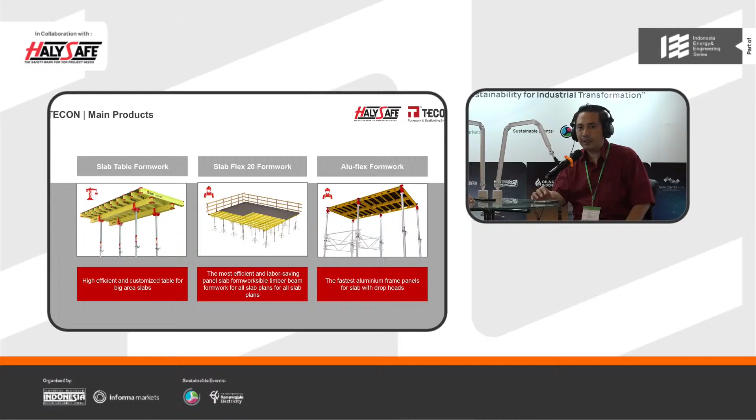Saya ingin berbagi sesuatu yang sangat menarik, khususnya untuk kita yang bergerak di dunia konstruksi, engineering, dan kalian yang sedang mencari solusi efisien dari produk Formwork untuk proyek pembangunan. Kita akan ngobrol soal bagaimana teknologi konstruksi terus berkembang, dan salah satu inovasi yang menjadi perhatian adalah sistem bekisting modern atau Formwork system, di mana Formwork system ini akan meninggalkan bekisting konvensional karena produktivitasnya yang tinggi.

Kami dari HalySafe bekerja sama dengan TECON dari Formwork, China. Kita berkolaborasi untuk menghadirkan suatu produk yang efisien dan bagus kepada kontraktor-kontraktor, kepada pengguna jasa kami.

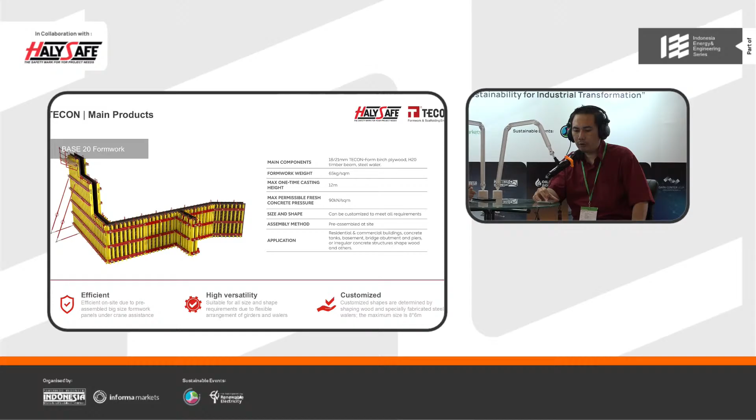PT HalySafe sendiri didirikan di tahun 2008, berawal dari Kota Pekanbaru Riau yang fokus utama pada penyediaan produk keselamatan kerja dan sistem scaffolding untuk mendukung industri konstruksi dan energi. Visi dari PT HalySafe sendiri adalah untuk menghadirkan produk berkualitas tinggi dan aman.

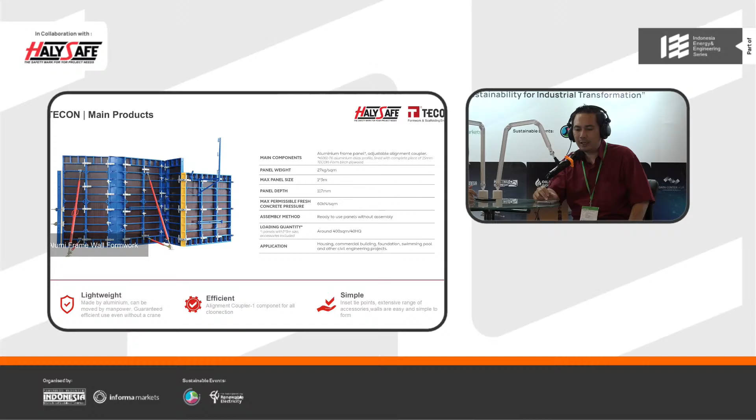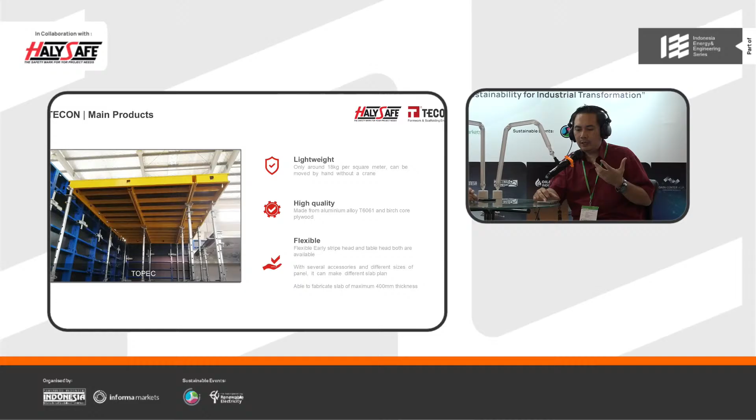Kantor kami berada di Marunda Center, daerah Bekasi. Umur kami sudah lebih dari 15 tahun di industri konstruksi ini, dan kami sudah dipercaya untuk memegang proyek-proyek besar yang berstandar internasional. Efisiensi yang kami berikan juga tinggi, serta dari segi safety, produk kami mendukung keselamatan kerjanya.

Saat ini HalySafe tidak hanya menyediakan produk konstruksi, teknis, custom engineering, serta dukungan teknis di lapangan. Kami percaya bahwa masa depan konstruksi membutuhkan solusi yang tepat, cermat, dan aman.

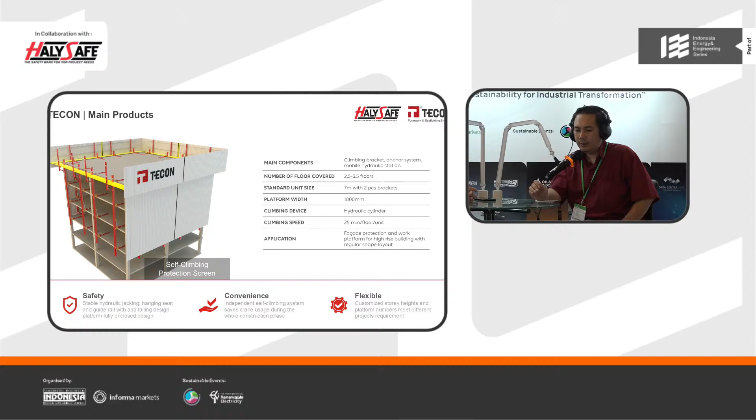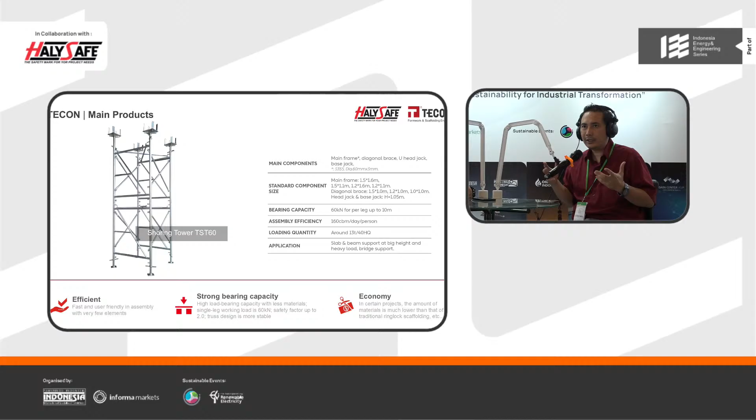Oke, berarti kalau boleh saya recap nih tentang pengenalan PT HalySafe. Berarti sebelumnya PT HalySafe belum masuk ke dunia Formwork ya? PT HalySafe berawal dari scaffolding, industri scaffolding dulu. Scaffolding itu digunakan untuk akses orang naik ketika melakukan pengecoran, melakukan inspeksi seperti itu. Dan sekarang yang baru kita tawarkan dan kembangkan adalah di dunia Formwork-nya.

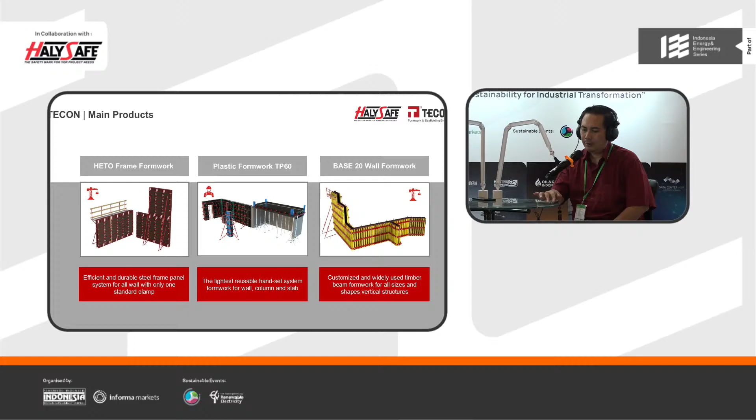Nah, teman-teman pasti pengen bertanya nih, kenapa sih HalySafe yang dari awalnya mempunyai core bisnis scaffolding nih, berarti pembelian, penyewaan, dan aplikator ya? Hal apa yang menjadikan HalySafe pengen mengembangkan sayap di bidang Formwork nih? Apa sih yang menjadi dasarnya Mas?

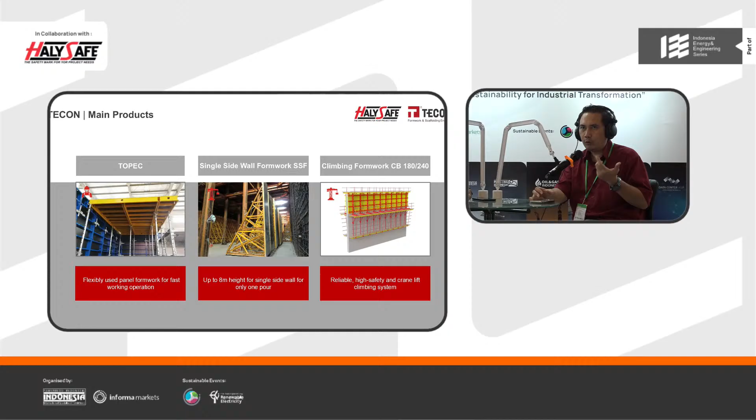Yang menjadi dasar sebenarnya adalah masalah yang sering terjadi pada penggunaan bekisting tradisional itu waktunya lama untuk fabrikasi, terus kurang presisi. Jadi begitu install, harus ada pengecekan ulang sehingga dari schedule itu sangat memungkinkan sekali untuk telat. Lalu untuk kebutuhan tenaga kerja itu banyak, karena tidak tersistem atau terpanel seperti produk-produk terbaru dari TECON tersebut. Yang terakhir, bekisting tradisional tidak ramah lingkungan atau banyak menimbulkan sampah. Makanya sampah itu sendiri kita minimalisir di proyek sehingga proyek ini bisa menjadi ramah lingkungan, dengan penggunaan sisa material yang sedikit.

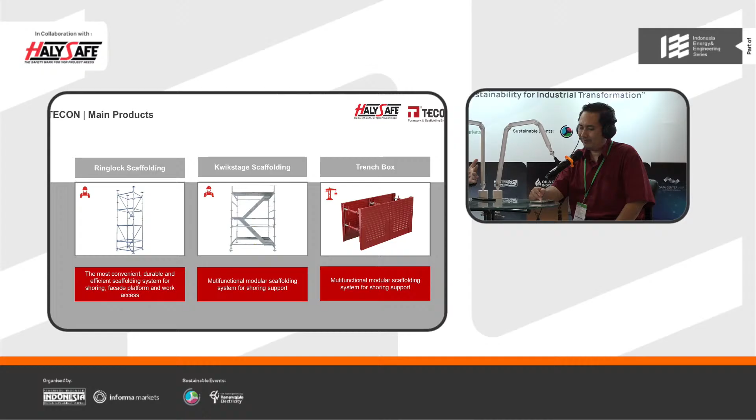Oke, I see. Berarti kalau dilihat dari sisi teknis dan sumber daya alat yang Mas Bagas sampaikan tadi, itulah beberapa hal yang menjadikan HalySafe pengen berkembang untuk mengembangkan sayap di bidang formwork. Mungkin ada nggak ya Mas alasan yang bisa memperkuat HalySafe untuk bisa mengembangkan sayap dari segi sumber daya manusia? Contohnya, karena HalySafe mempunyai tim engineering atau tim yang berpengalaman di bidang formwork, apakah ada juga di HalySafe untuk saat ini?

Pasti, di HalySafe sekarang kami juga melakukan riset sebelum memutuskan untuk bergerak di bidang formwork. Kami riset juga di bidang engineeringnya seperti apa, terus project-project yang sedang ongoing seperti apa, kita riset semua. Jadi yang kita butuhkan itu memang solusinya tepat dari engineering. Kita menghitung, awal mula adalah dari engineering kita pasti menghitung dan merencanakan di awal. Setelah kami rencanakan, nanti kami terapkan di lapangan dan kami evaluasi. Di evaluasi itu kami ada formwork instructornya atau kami bisa terpasang sekalian, dan nanti kami juga ada tim untuk memonitoring schedule-nya seperti itu.

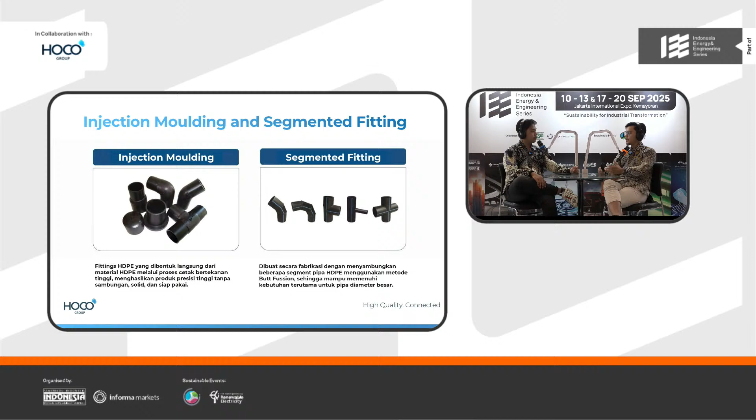Kenapa? Karena kita menyediakan fitting-fitting seperti injection molding atau segmented fitting untuk pipa HDPE, yang dimana pabrikan-pabrikan pipa lain itu tidak menyediakan fitting-fitting ini. Beberapa pabrikan tidak menyediakan fitting-fitting ini. Maka dari itu HOCO Group dengan motonya One Stop Solution, kita menyediakan injection molding dan segmented mulai dari ukuran terkecil sampai ukuran terbesar, yaitu di 1200 pada saat ini, Bapak Denis.

Dan juga HOCO Group melalui brandnya HQ, kita juga menyediakan fitting-fitting terkecil atau fitting-fitting mekanikal mulai dari ukuran 20 mm sampai ukuran 4 inch untuk fitting compressionnya. Berbagai jenis fitting pun kita lengkap, dari elbow, dari male, adaptor, female, ball valve yang compression, stop and flank, kita ada semua, Bapak Denis di sini. Firewall, clamp saddle pun kita ada.

Selain itu untuk yang biasa digunakan oleh penyedia air atau PDAM, itu biasa menggunakan push fit dari produk HQ ini, Bapak Denis. Yang dimana push fit ini tidak perlu menggunakan alat khusus atau alat pemanas ataupun lem, itu tidak perlu, itu makan waktu. Nah, dengan kita menggunakan push fit ini, dia tinggal dicolokkan saja pipanya ke fitting. Yang dimana itu bisa hemat waktu, hemat biaya, dan hemat tenaga. Karena tinggal dicolok saja langsung air mengalir.

Dan jenis fittingnya pun bervariasi. Ada elbow, ada adaptor, male, female, dan lain-lain pun kita sediakan semuanya. Karena kita itu punya moto One Stop Solution, jadi benar-benar seluruh konsumen atau kontraktor atau owner hanya datang di HOCO Group aja, tidak perlu melihat-lihat yang lain.

Dan yang terakhir kalau kita bicara instrumen perpipaan atau plumbing, itu tidak lepas dari valve, Bapak Denis. Betul. Valve dari HOCO Group itu kita memiliki berbagai macam jenis, gate valve, check valve, strainer, ball valve, dan yang lain-lainnya. Dan yang terunik kita juga memiliki untuk yang brassnya itu ada brass ball valve check valve. Itu yang biasa digunakan di PDAM, Bapak Denis. Itu bisa untuk menurunkan tingkat NRW.

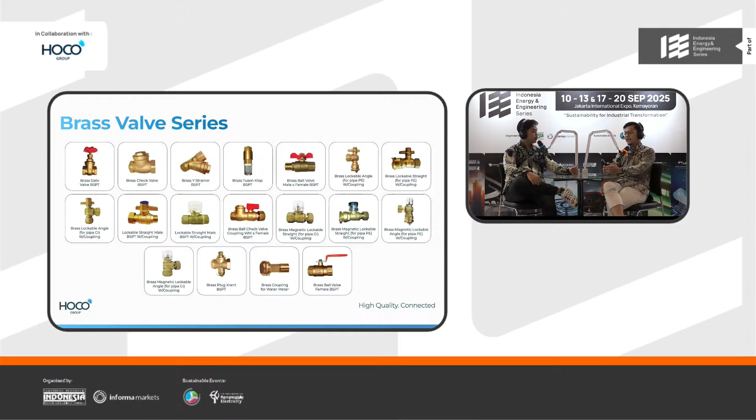Nah, untuk fitting-fitting ini kita bagi beberapa jenis. Ada yang dari bahannya kita ada brass valve, ada yang cast iron, ada yang ductile cast iron. Kalau dari standar valve-nya kita bisa mengacu ke JIS juga kita ada, Bapak Denis. JIS 5K, JIS 10K kita ada. Kalau yang biasa menggunakan ISO, kita juga bisa mengacu ke PN 10, PN 16, PN 20 atau 25 kita pun sedia, Bapak Denis. Dan yang terakhir yang biasa jarang ada di Indonesia, itu biasa digunakan di oil dan gas, itu menggunakan standar ASME. Itu dengan standar ANSI 150, ANSI 300 kita pun sedia.

Jadi benar-benar seluruh sistem perpipaan atau infrastruktur perpipaan itu kita sediakan. Mulai dari hulu sampai hilir. Mulai dari pipa induk sampai pipa sambungan rumah, bahkan kran pun kita sediakan, Bapak Denis. Hanya saja pompa dan meter air yang kita belum ada, Bapak Denis. Tapi mungkin ke depannya kita akan berinovasi ke arah tersebut, Bapak Denis.

Seperti itu, Bapak Denis. Dan yang terakhir, kalau kontraktor mungkin bingung cara masangnya seperti apa sih pipa HDPE ini, kita juga sediakan mesinnya, mesin welding, terkhusus mesin butt fusion ini, Bapak Denis. Mesin butt fusion ini dia menyambungkan kedua pipa itu sama-sama yang bersifat homogen. Jadi di sambungannya tersebut seperti badan pipa yang utuh pada umumnya. Jadi benar-benar dia homogen, kekuatannya sama, kelenturannya sama, dan dia benar-benar bisa mengikuti kontur dari Indonesia ini, Bapak Denis.

Baik Pak Faris dan sobat-sobat HOCO semua. Jadi bisa dikatakan HOCO Group ini one stop solution ya, karena mulai dari proses penyambungan pipanya, dari varian pipa dengan ukuran-ukuran dan yang apapun yang bervariatif itu, betul, bahkan sampai ke fitting, aksesoris dan lain-lain sudah disediakan oleh HOCO Group ya. Betul Bapak Denis. Oke, mungkin kiranya itu yang bisa kita sampaikan kali ya.

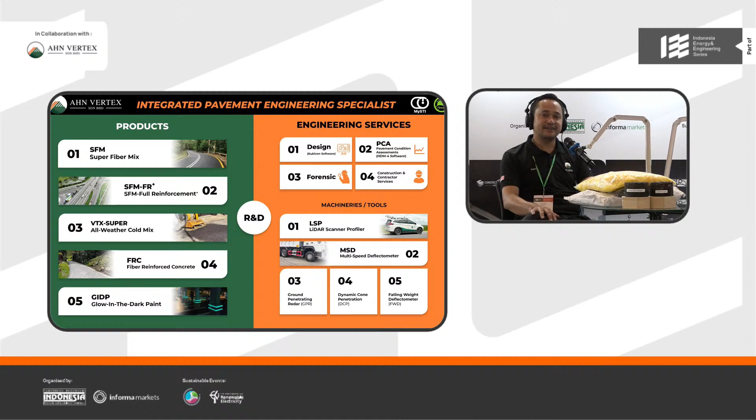I will share with you a bit later on. Our first product is the SFM, short for Super Fiber Mix. It is one of our specialty mixes that we use in Malaysia. We have a conventional mix and also special mixes here in Malaysia. Super Fiber Mix is now the number one special mix in Malaysia, and it has been used widely all over Malaysia, including Brunei.

Now we are entering Thailand, and we are hoping one day we can start here in Indonesia. It has been used on more than 12 million square meters all over Malaysia, equivalent to close to 3,500 kilometers of road total.

What does it do generally? We mix our normal asphalt with this specialized fiber. Why is it special? Because it's mainly made of aramid, the same material that we use to build our tanks, our armored vehicles, our space shuttle. The same material, we put it into our asphalt and it makes it stronger, way more stronger.

Currently, this technology, we've been using it for a long, long time, probably decades or even close to a century. So now we have provided an innovative solution where we further increase our road strength. Generally speaking, it is also very suitable in Malaysia and also in Indonesia.

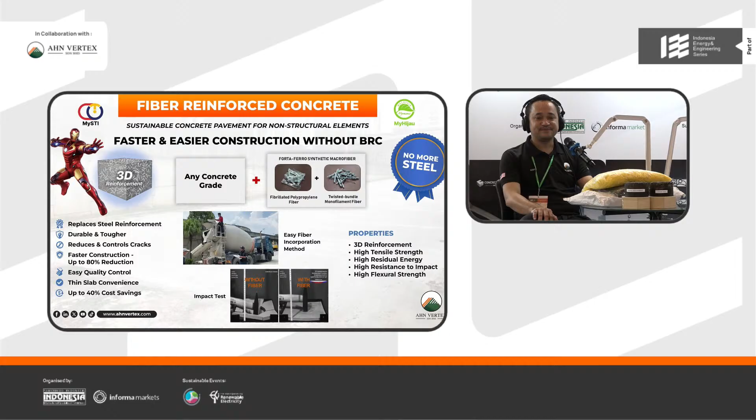Next, actually one of our hobbies, we have glow in the dark paint. It can glow up to 10 hours. Now it is being widely used in Malaysia, but of course it's still a new, novel technology. It's the only one in the world that can glow up to 10 hours.

How it works is that it charges using light, artificial or even sunlight, and then at night it releases that energy and gives you a glowing effect up to 10 hours.

Whether you use it on roads, on signages, or inside buildings for emergencies in case you don't have electricity, such as when there's a fire going on, we have done it inside buildings for emergency cases. Your creativity is your limit. Since it is paint-based, you can use it on any surface, be it metal, asphalt, concrete, or even wood. It's very nice actually.

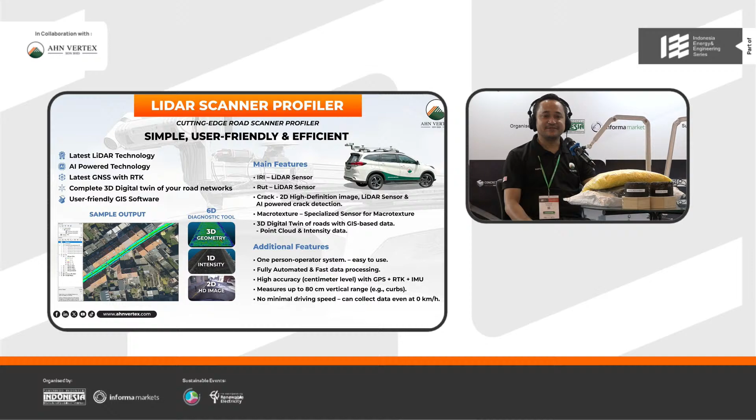Next is our MSD. Just now the LiDAR checks your surface, and our last product is MSD, multi-speed deflectometer, which checks the structure of your pavement. Again, you just drive through, scan your roads, and the decision maker will get a GIS-based mapping to know where they should optimize or repair the road, instead of second guessing anymore where repairs are needed. I think that is it from me.

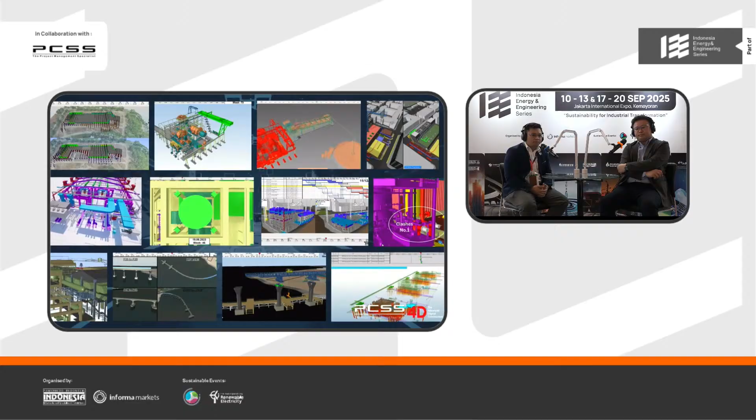So you want to talk about our projects? I think we've been involved in a lot of projects from the beginning - in the construction of buildings, mining, oil and gas, and infrastructure work such as bridges and MRT. So this is all of the projects that we are involved in. With this kind of experience, we try to bring it to Indonesia and spread this as a solution to the complex projects that we have there.

I remember that you did one project in Australia for one of the Australian clients. I think that's pretty impressive, isn't it? Yes, that was a gold mining infrastructure project that we wanted to build in Australia, and they asked us to simulate their work program into a 4D simulation.

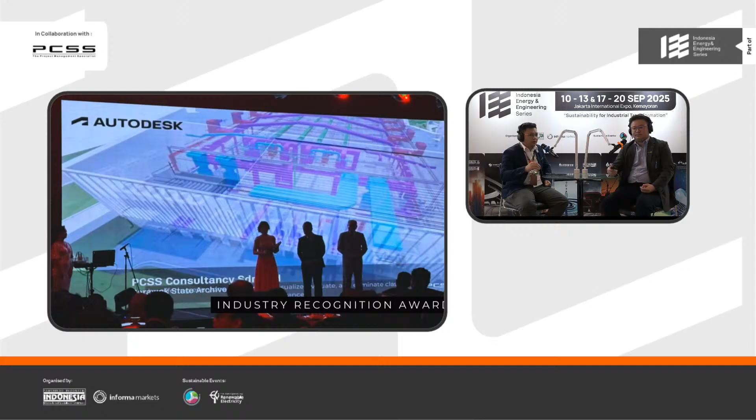In terms of what we're doing right now, it's not easy for the engineer itself to learn. That's why I suppose you train a lot of engineers, giving training and mentoring services to these guys. Yes, this is part of the solutions. If you want the solution to be sustained, we also need to train the users how to operate it, and based on our experience, we can share how it can be valuable to the industry.

I suppose all your training is proven, and I can see that from the screen itself. There are a lot of awards that PCSS has won, and it's now recognized as one of the best project management companies in the region, especially on digital construction. I think your vision plays an important role in PCSS, so that we can move forward.

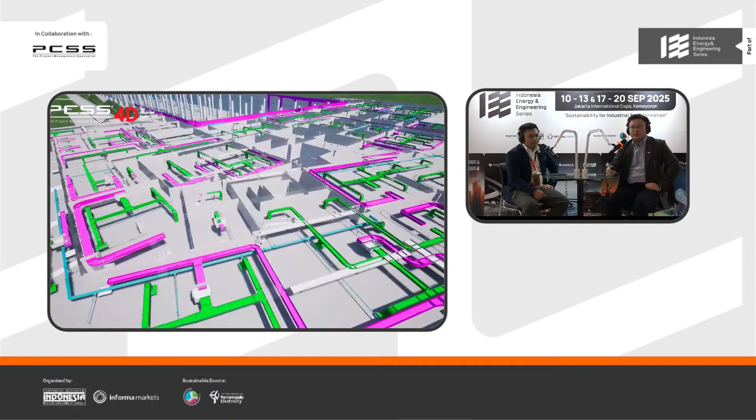In terms of Indonesia, what will be your target there, and what can we do to serve Indonesia with this kind of achievement? I think the whole idea of the company is to share capabilities and knowledge with all the peers in the industry, other than making money for the company. The whole idea is sharing the knowledge and using technology to really resolve our day-to-day work, especially in engineering works.

It's difficult, and we don't have enough engineers in the construction industries right now. I suppose this oil and gas project you were involved in gives us an eye-opener on how project management can be so different, in terms of execution. So how do you make decisions right now in terms of construction planning? Does it help clear the clouds between you and the client?

I think it started with the same questions we usually get asked during construction - what is going to be constructed, what is going to be installed at this time period. In your time, there was no solution like this BIM solution, so it was very hard to explain, right? With nowadays' innovative technologies, it can bring the construction industry up to another level.

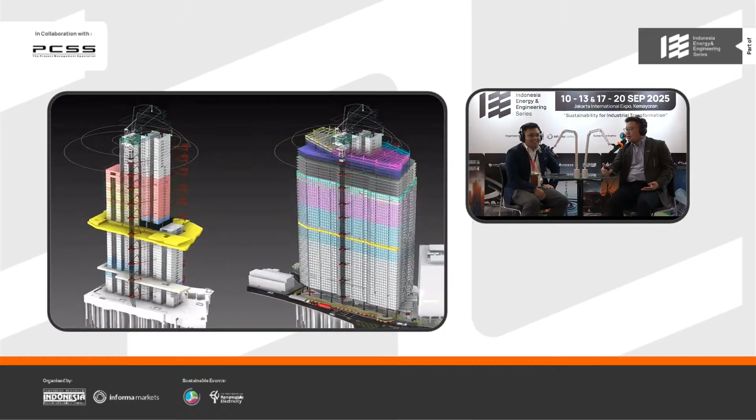More clarity - I suppose this is how it's going to look. Quite nice, right? You can see the whole simulation of how this construction is being built and how it's put together. I suppose non-engineers, when they look at this, understand that it's idiot-proof now - very easy, intuitive, and you can combine it with other methods like this one. This is quite nice. What we do is like site coordination.

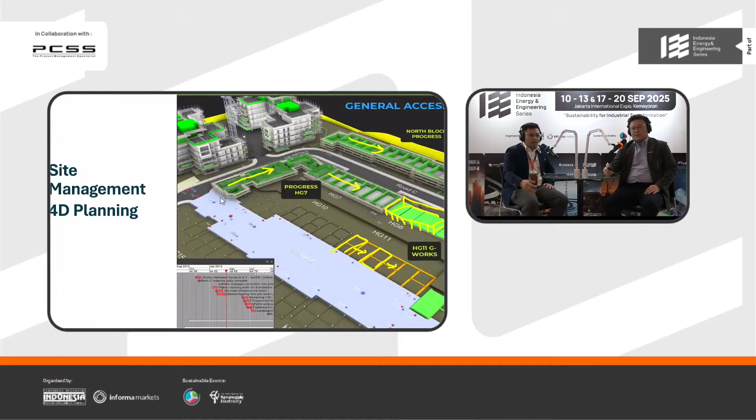Using it for logistics and spatial analysis, all of this is very innovative. Last time we used to do it using a 2D plan drawing. This basically goes back to the basics, where you see it and believe it on your plan itself, so it becomes very easy to pick up what's going on.

This is one of the very success stories, because the equipment was being delayed and we needed to install it under 10 months. In the board meeting room they asked when this machine was going to be installed, and we said yes, we can install it.

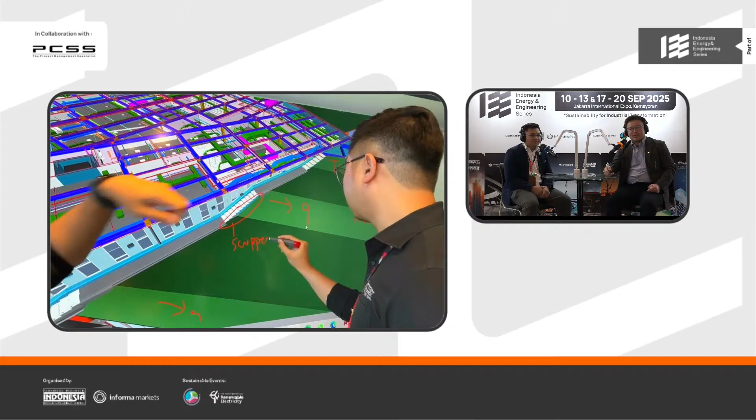So you see it before it happens on site. We rehearse it. This is where digital construction helps you in terms of how you deliver your project itself, and enhance your discussion through dashboarding and the technologies and platforms that we use.

So basically it's all about improving the whole communication workflow. I think that is the highest tier that we want to achieve.

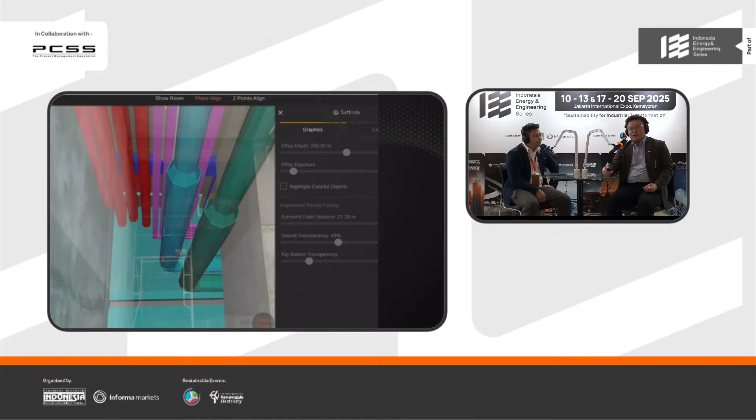Try to look at this graph that we have right now. Basically, before you even build the pipeline into the area that you need, you can use the model itself to look through what's coming up next in the construction, which helps in terms of the planning itself.

Yes, you look from the top level until the bottom level of the M&E, so you can prioritize which item you want to install first and which team you want to move first in the area. So using 4D is easy—it's a medium for coordination.

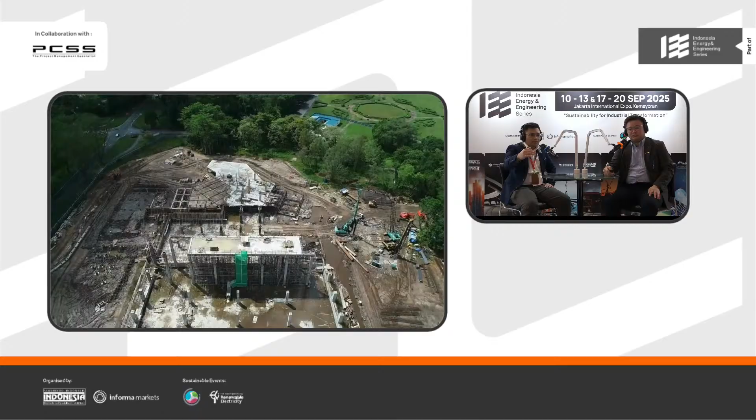In the reality mapping for our company, we try to capture all the surrounding areas of the project site, so that we give another vision to our planning, because previously our planning was just focused on the scope of work.

So basically it's like site constructions—any obstruction on site, you try to have coordination meetings. I suppose this really helps in terms of the whole monitoring of the project itself, and I'm quite impressed with this output.

This is what we did about 2 or 3 years ago in PCSS. With the projects we have today, it probably goes beyond that. One of the best monitoring projects we have right now is the cross-region project between these two countries—Singapore and Malaysia.

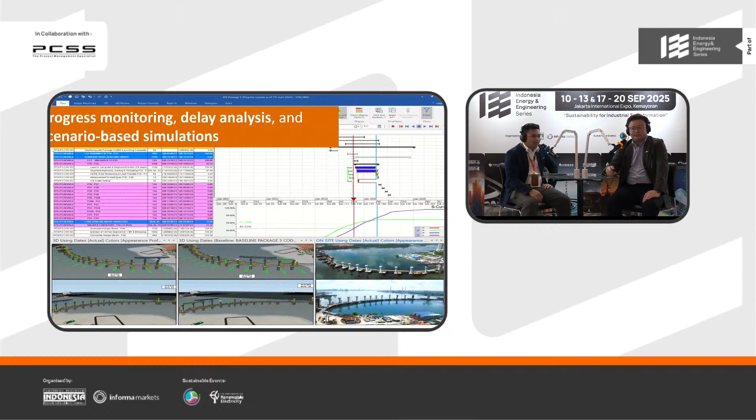This is part of our involvement, and we help in terms of identifying the critical activities using 4D. When issues come up, 4D helps us optimize the schedules and find another path in our critical path, so that we can complete on time.

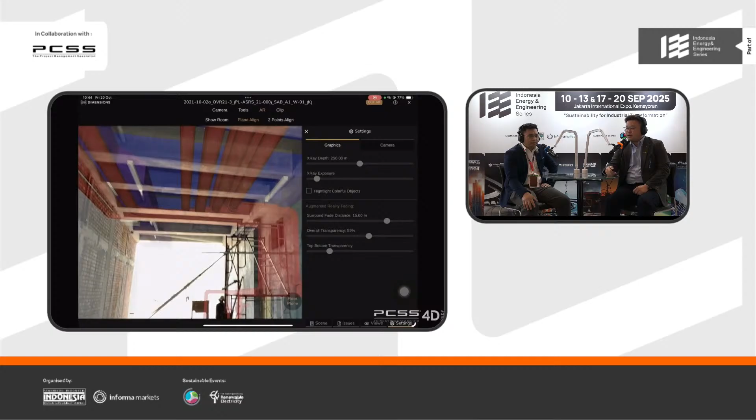I can see that you also use the VR and AR system on site. This is quite good actually—once you have 4D inside the project, you can bring in other technologies.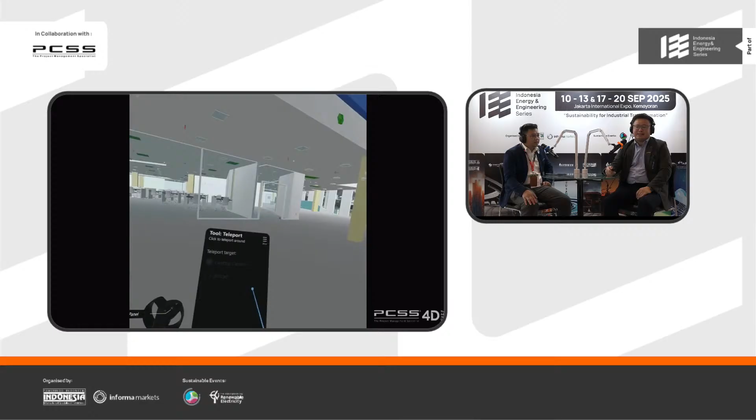And these technologies, VR, at times we want to go on site when we want to do VR, so we need to use 4D to set up the time. It gives you clarity to look at what's going on inside there, and gives us a lot of clarity in terms of coordination on site.

So basically, this reduces the learning curve for the engineers, so that they know and understand it. So try to look at this right now.

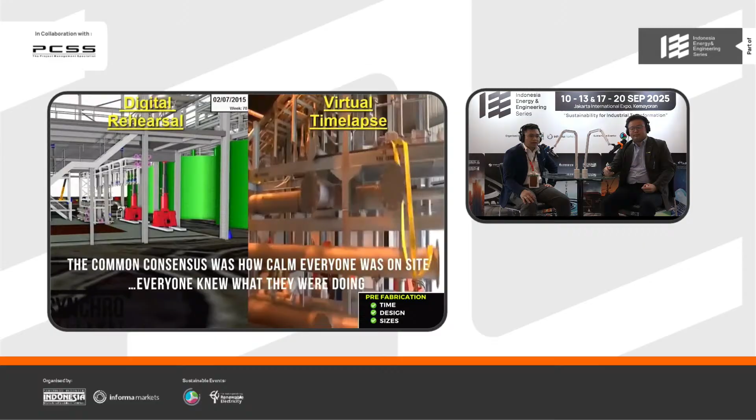We basically did a digital rehearsal before it really happened on site. This is what you practice on and talk to the clients about. By viewing the constructability earlier on, this gives us more in-depth understanding of the sequence of work, and also helps coordinate between our project teams.

These are really good solutions that we've been providing in Southeast Asia right now. As PCSS, we've been here since 2018. We have had clients like PTPP, Adhi Karya, Pertamina. We try to look at more opportunities. Our idea is to come to Indonesia to share knowledge, to learn together. We hope that one day we can come here to Indonesia to share more ideas. We are Asian countries, we are neighbors, so I suppose it's good for us to keep doing what we're doing and share the knowledge of what's happening around the region.

Especially with the exposure that we have, I would like to bring to you these videos - the Rapid Transit System RTS Johor Bahru, one of the Singapore updates and constructions that we have done.

The dream of a seamless connection between Malaysia and Singapore took shape in the form of the rapid transit system, a monumental project designed to link these two nations closer. Building such a bridge was no easy feat - it took good coordination and was successfully delivered harmoniously. It was a story of complex challenges, innovative solutions, and unwavering dedication.

At the heart of this narrative lies package three, the marine viaduct.

By December 2024, the package three marine viaduct was completed, meeting key milestones. The project is on track to finish, and if you need any context or more information.

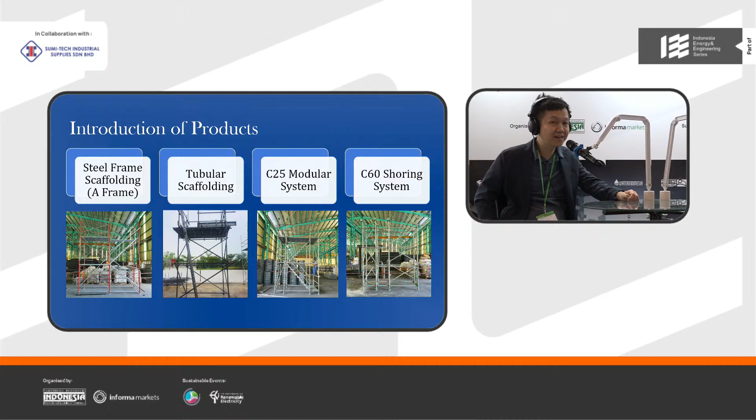So if clients are interested to buy our system, I would always say it's better to have a versatile system, because in construction we do not know what will be our next project. If we have a versatile system, it could be used for whatever future projects, no matter whether it's a data center project, an infrastructure or bridge project, or maybe just a low-rise, shop houses, or double-story terrace houses.

So the product is actually very versatile, as it can be used from small scale projects up until large scale projects.

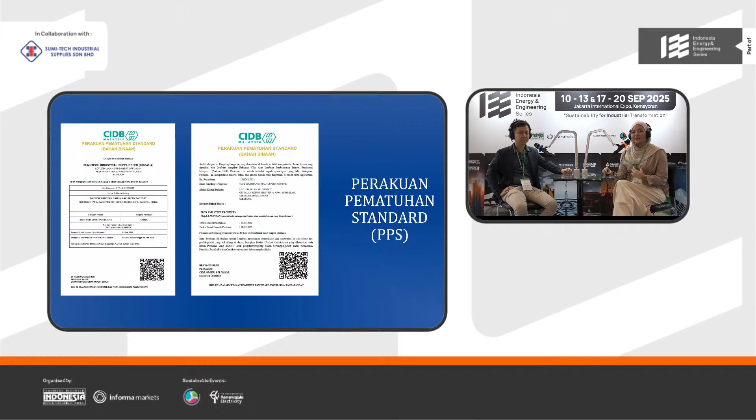Our product is also manufactured under strict quality control, following the compliance of CIDB certification. With that, we can say that our product is very reliable and safe to be used.

Next, I'll be sharing with you our C60 shoring system video.

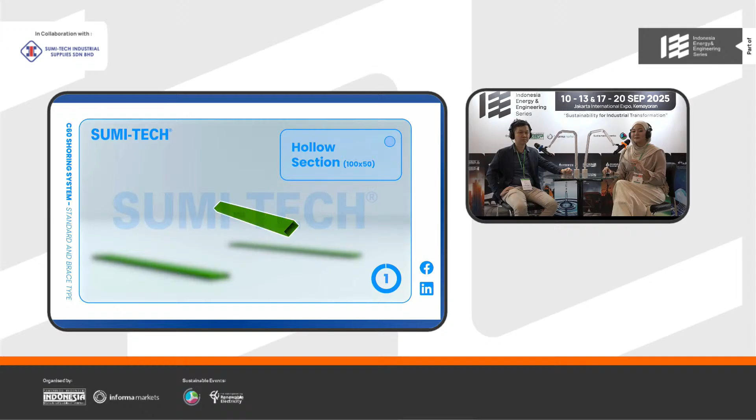Our C60 shoring system actually has a high load bearing capacity, and it can be used from small projects up until large kind of projects.

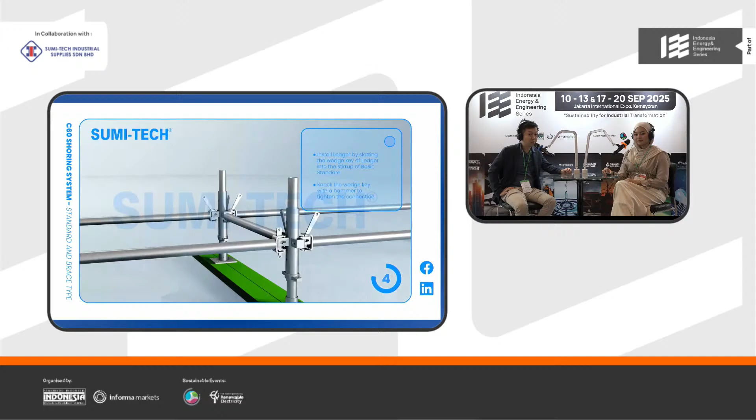As you can see in the video, this is called a modular scaffolding system, where a wedge key is joined into a stirrup. The only tool you will require for this system is a hammer to tighten the wedge key to the stirrup. It is very convenient and easy to install.

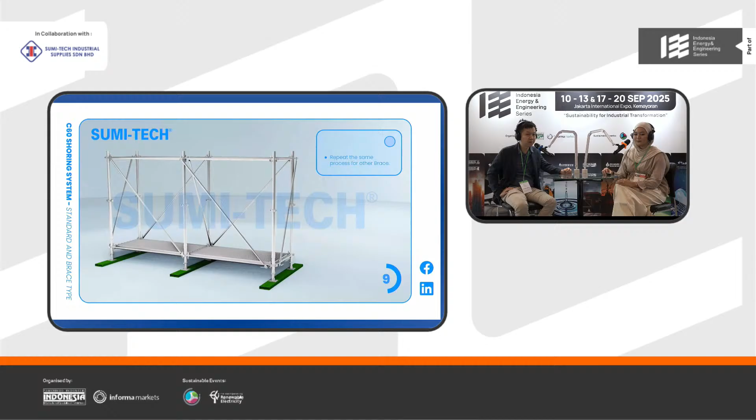With the horizontal member, the vertical member, and even the diagonal member, the shoring system or scaffolding system will be very stable and rigid.

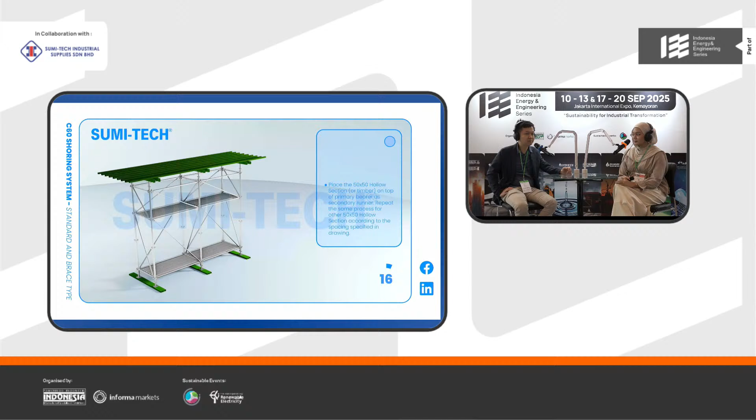So if you look at the video, on top of the U-head, you can actually put whatever as the primary member and the secondary member as formwork. You can actually use hollow sections, or you can even use timber structures. It can be used for various sizes for the hollow section, right? Correct.

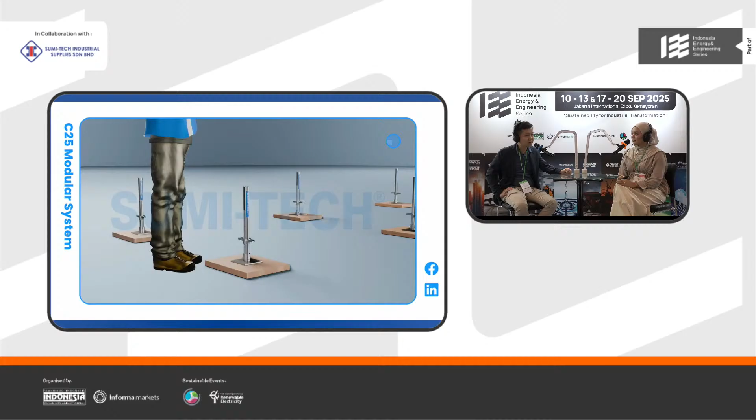Alright, so next I'll be sharing with you guys about another system, which is the C25 modular system. The C25 modular system is basically similar to the C60 shoring system, but slightly lighter duty because the vertical member is smaller compared to the C60 shoring system. So normally the C25 modular system will be used for light duty shoring, and also as a scaffolding, a working platform, and an access tower.

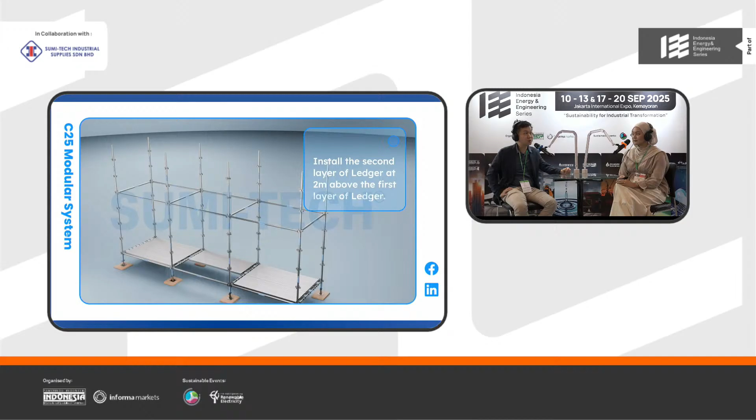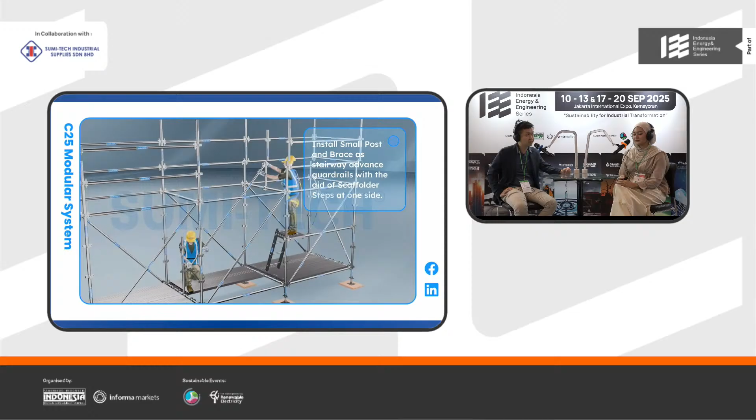Recently, we have been updating our system to comply with SG4, where now we are not looking at safety only for the users on the platform, but we are also stressing the safety of the erector as well. As you can see, the erection method introduced in this video is actually utilizing the latest method from SG4, where all the guardrail systems are pre-installed. That means it's considered an advanced guardrail, which is installed at the lift below before the workers access the lift above. Practically, with this installation method, you will not need any safety harness anymore.

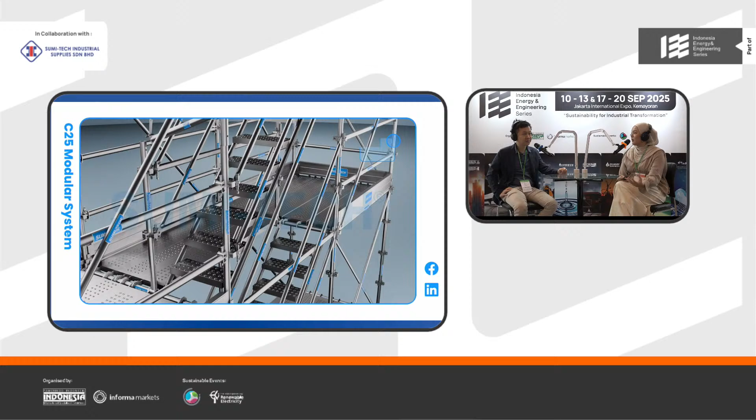Even I myself might, or you maybe, would dare to go up and install it yourself, as you wouldn't be exposed to any risk of falling at all. Correct, that's what we want to focus on. This system focuses more on the safety of the erector and the worker itself, so that they are not afraid to assemble. This is in fact according to the latest UK guideline, SG4, that I mentioned just now. So we do hope the industry is improving and getting better and better in safety performance, hopefully.

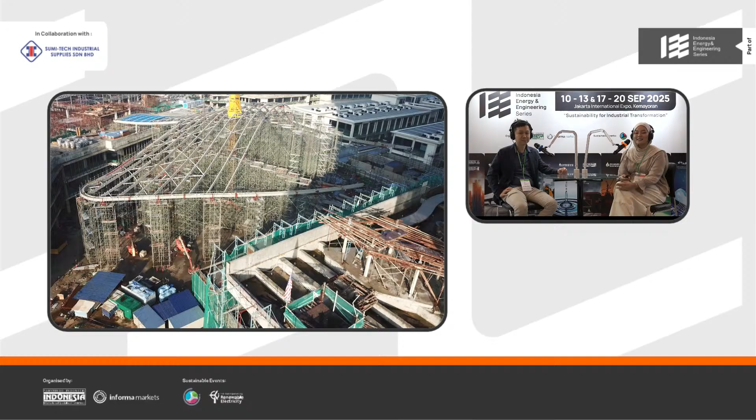All right, moving on. This is the photos of our past project, and we are also proud to share that we are part of the Merdeka 118 construction, supplying our steel scaffolding for them. Today, Merdeka 118 is known as Malaysia's tallest skyscraper.

Before we end it, is there anything you would like to add? Okay, so at the moment, we would like to look for local partners in Indonesia, hopefully so that we can expand our business into Indonesia.

And we are very confident in the market of Indonesia, as from what we know, the conventional A-frame, the traditional A-frame type, is not allowed to be used at certain projects. So now more and more projects in Indonesia hopefully will be using a modular scaffolding system. And of course, with all the new projects like data centers and industrial warehouses, hopefully our C60 table form system will be very suitable and very cost effective to be used, and to be introduced to Indonesia.

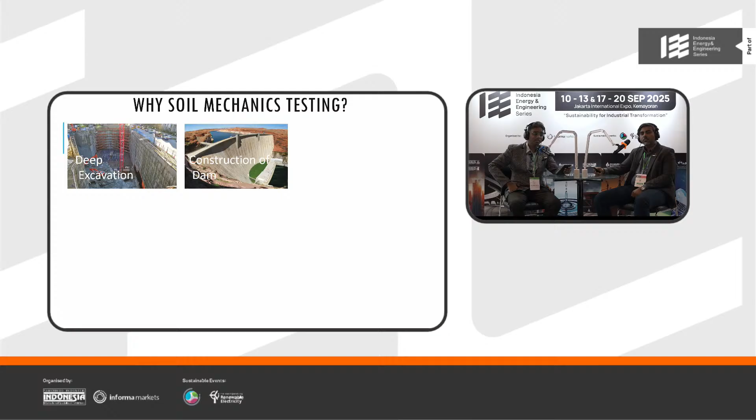So why soil mechanics testing? I think Ms. Nessa, you can explain this. Thank you, Mr. Kalai. As we know, all structures, including deep excavations and so on, depend on the soil beneath them, but soil varies greatly in terms of strength and behavior. Misjudging this can cause foundation failures and instability. That's why thorough soil analysis is crucial for safe and lasting construction. Tests like the triaxial compression test simulate real conditions to measure soil strength accurately. These tests help engineers design solid foundations that stand the test of time.

Then I'll hand the rest over to my colleague Kalayarasu to explain what he can offer. Thank you. So that means soil testing is very important. We cannot make any guesses, right? So we need to do actual testing to make sure whatever we're going to build on the soil is on solid ground. Yeah.

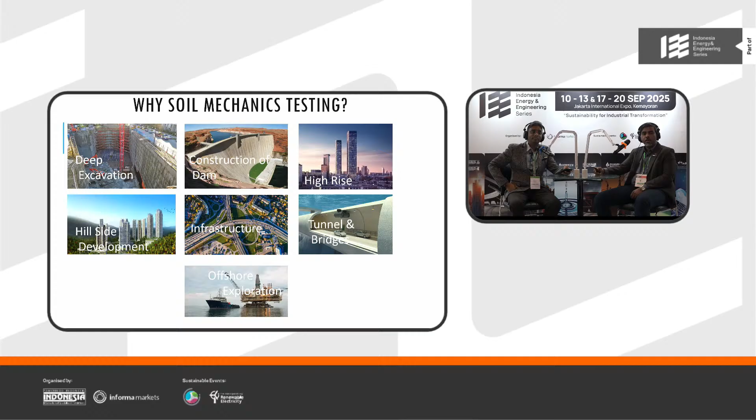But the nature of testing in the laboratory, in most laboratories, we have still been using manual equipment. Sometimes when there is a lot of testing, too many samples to be handled, we will have a lot of errors, a lot of mistakes happen. We faced this before too. Yes, so many. This leads to poor data, and this data becomes unreliable for geotechnical engineers to make any assessment.

This also leads to low productivity, meaning we cannot meet the testing in time. Certain projects are very high value and they need the project to be completed, and when there are a lot of samples, the laboratory usually lags behind. Not to mention, sometimes the equipment is also very expensive to maintain because they are usually very bulky, have a lot of components, and have to be manually serviced and maintained.

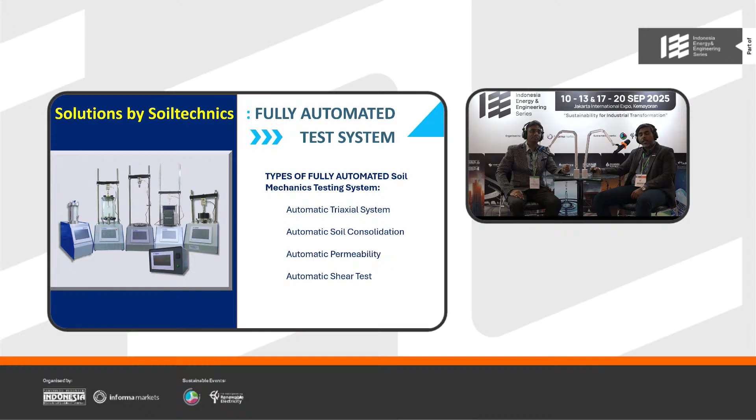So what we have to offer: Soiltechnics has a products division where we design and manufacture testing equipment. We have manufactured a fully automated test system which has tremendously benefited laboratories in terms of productivity. The tests are fully automated from start to finish, and because it is automatic, running 24/7, we are able to finish more tests in a given period of time. Thus productivity can be increased up to almost 70% compared to the manual test system.

Multi-test capability: our systems are very modular, so each system can be reconfigured to perform multiple tests and different kinds of testing.

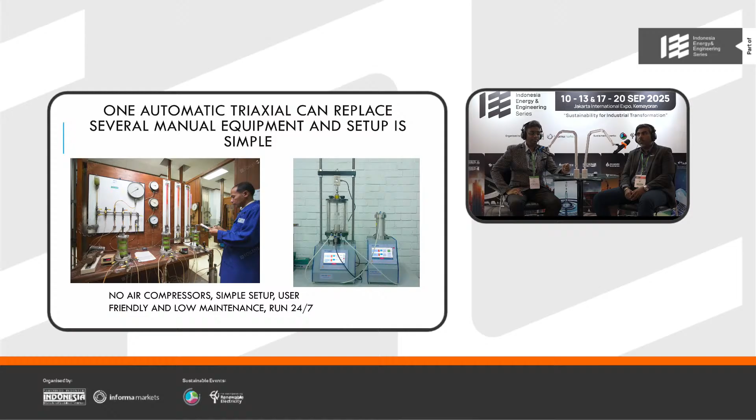This depends on the user. If they do not have a lot of volume, what they can do is purchase one device, and they can switch the configuration to perform multiple tests. This lowers the cost of setting up, especially for new labs. It's also very useful for universities where they do not necessarily need a lot of systems—they just have one or two systems and can reconfigure them to perform different tests. Yes, that's correct.

Even our software is modular, so we can do multi-stage setups, and for each stage you can create customizable test plans. You can create your own conditions, your own recipe, and the system, the computer, will run the test for you. Data acquisition and data logging are fully automated—there are no more physical papers, so data integrity is maintained.

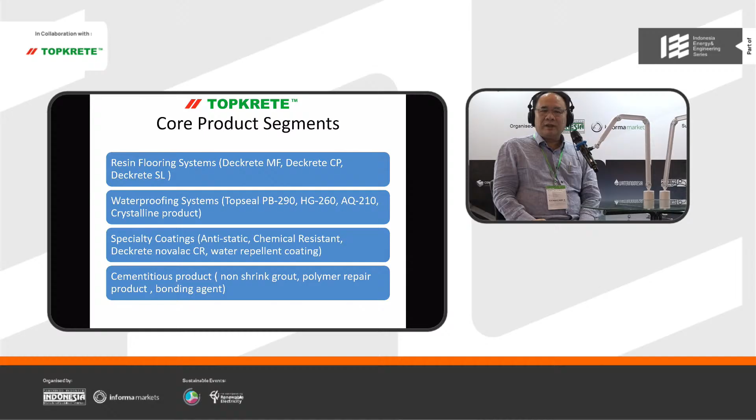What is the advantage of Topkrete? We produce seamless and durable coating, chemical and abrasion resistant, and HACCP compliant for the food industry, as well as long-lasting waterproofing performance.

This is some of our feature projects like car park system with Deckrete CP, food factory flooring with our Deckrete MF polyurethane self-leveling product, basement waterproofing system, RC waterproofing system, and resin floor system. We provide all kinds of concrete solutions in terms of protection, wear and tear resistance, and chemical resistance.

We have an innovation and R&D team, in-house technical expertise, cementitious product development, and collaboration with global partners around the world to keep developing and improving our product quality to meet the current market.

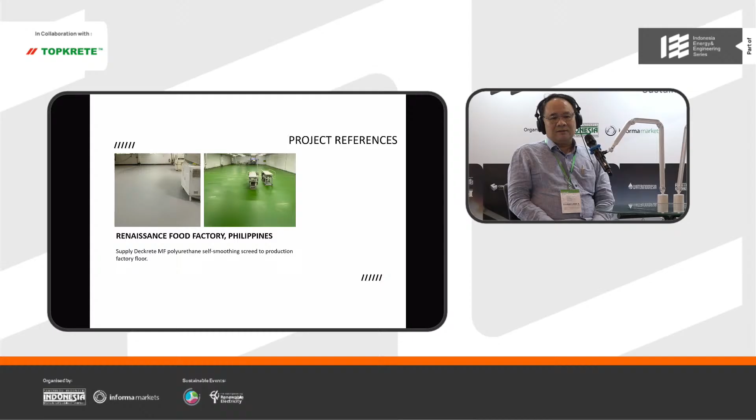This one also uses our Deckrete MF polyurethane product for this Pioneer Denim factory in Bangladesh. This one is a food factory in the Philippines using our self-smoothing system for the food production area.

This is a protective coating, our Deckrete Novalac CR, used for an ETP plant in Bangladesh to protect the concrete from being affected by corrosive water. This one is an anti-corrosion coating.

This is a project reference in terms of waterproofing in Malaysia, like Four Seasons Hotel Kuala Lumpur. We supply our material from the basement up to the RC flat roof. The client is Capital Land. This is a 5-star hotel using our waterproofing system throughout the project, as well as the car park coating for the whole car park.

This is another project in Malaysia, the Troika. The designer is Norman Foster from UK. We are supplying the basement waterproofing, car park system product, and protective coating for the facade, concrete facades, to prevent concrete from corrosion and for protection.